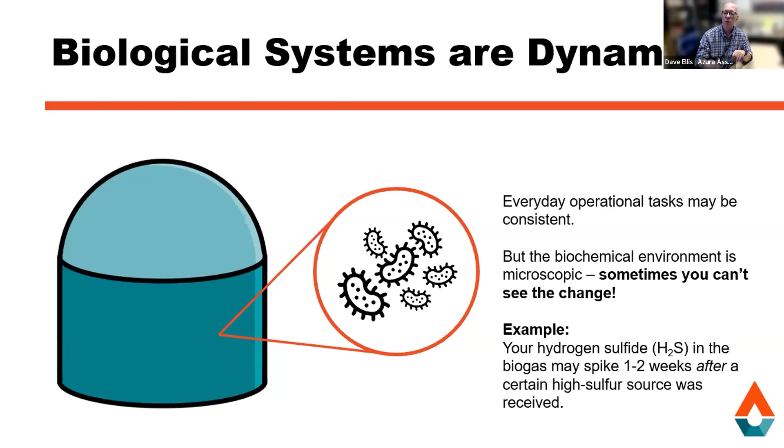Specifically, I'm talking about hydrogen sulfide, or H2S. That's a gas, a component of most biogas streams. It's extremely hazardous and can certainly kill a person in small amounts over a short time period, so it is one of the hazards. Luckily, the biogas is supposed to stay in the tank, or in the pipes, the engine, the upgrader—it's not supposed to be out where someone can encounter it.

The H2S comes from reactions that break down the proteins, or even some of the different process additives that might be part of the feedstocks. Here are some examples of feedstocks that can increase your H2S risk: first, high protein feedstocks like spoiled meat, for instance. Proteins contain a lot of sulfur, so when that protein biodegrades, a lot of that sulfur is released, and that can give rise to hydrogen sulfide in the biogas.

So say, for example, a refrigerator breaks down at a grocery store—now you might have 3, 4, or 5 tons of spoiled meat to dispose of.

Another feedstock could be from processes that use aluminum sulfate. Aluminum sulfate is used a lot in wastewater treatment, for DAF sludge. DAF sludge is a dissolved air flotation process that collects the greasy skimmings off of the top of, say, an industrial wastewater treatment plant.

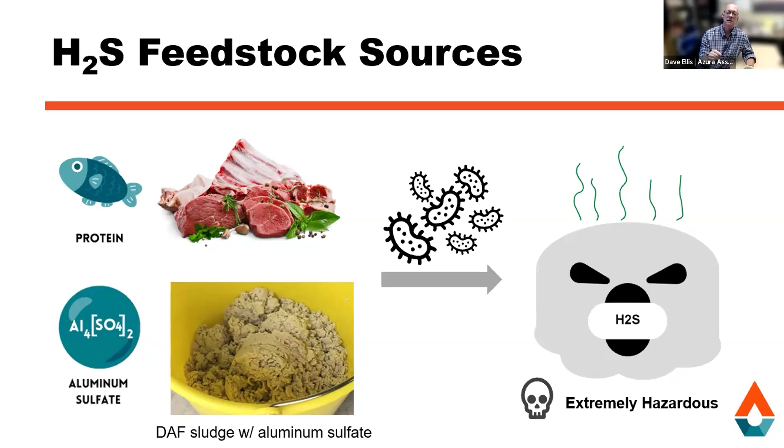Luckily, there are plenty of ways to manage hydrogen sulfide, like different iron additives that can be added to the digester, using a sulfur oxidizing bacteria in the digester itself or external to it. There are different equipment that can be used to help with that. But one key is you can strategically manage your feedstocks to minimize your hydrogen sulfide risk.

Let's see how this could work. If you've got a load of spoiled meat, a high protein feedstock, that can increase your H2S risk. If we have a different feedstock that's high in iron, like this DAF sludge produced using iron chloride in the wastewater treatment process, these two react in the digester in a way that one counteracts the hydrogen sulfide risk of the other.

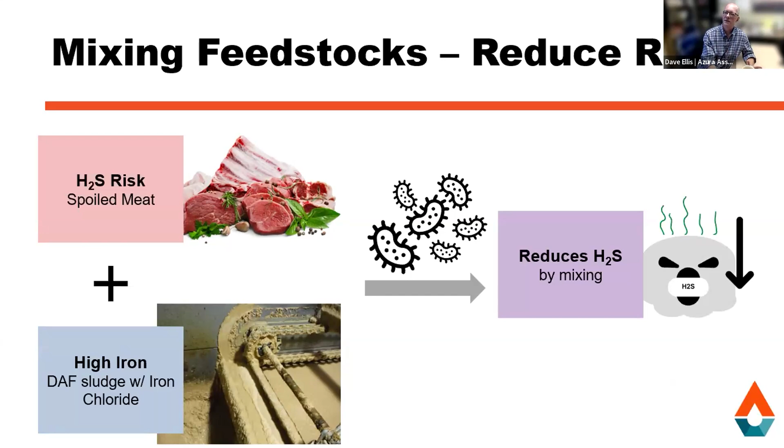Now, hold on a second though. I said something strange - both DAF sludges, just different things happening in how they are made. So the sludges can be risky or a useful tool, depending on how it was made.

Let's see here. The photograph on the left-hand side is a DAF sludge from a very large dairy milk facility in Mexico I was at last summer - they use aluminum sulfate in their wastewater treatment process. The DAF on the right-hand side, you're skimming that greasy material, scraping grease from one of the largest chicken wing manufacturing plants here in Canada. That facility uses iron chloride as part of their wastewater treatment.

So this is to say that it's important to understand where your feedstock comes from and how it's made, and how that may impact your process and create some challenges.

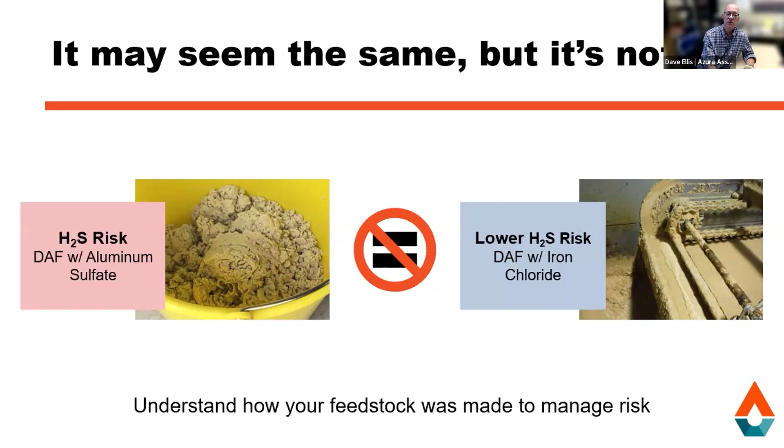Also, be aware of the safety and process risk that comes from mixing feedstocks. For example, if you have a receiving pit filled with an acidic feedstock, like fatty wastes, and the next day you receive some alkaline material, like bread waste that has some cleaning products in it, these chemicals can react in the feed tank itself and cause foaming that overflows your receiving pit.

So this is a demonstration I did in my garage lab several years ago, mixing the different materials, letting it react for about 2 hours, and it foamed up pretty quickly.

So foam can pose a number of risks. In the feed tank, the foam is slippery, so if it's out on the ground, it is definitely a slip, trip, and fall hazard. Also here in Canada in wintertime, we can have ice issues as well, which can increase the risk of slips. It exposes operators to potentially biohazardous material - rotten meat, for instance, can contain salmonella or other bacteria. And there's definitely an opportunity for an odor risk that increases the chances of odor complaints from your neighbors, and of course, regulatory scrutiny and intervention for sure.

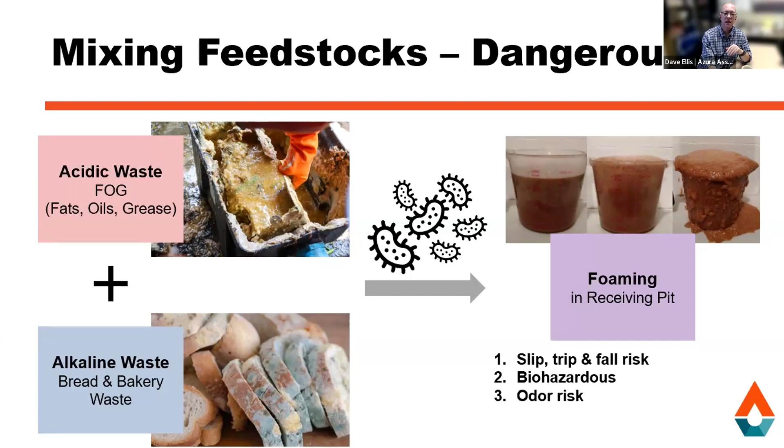So far we've mentioned a few of the process risks related to feedstock. In the time we've got today, I'm going to follow one real-life example of some of the lesser-known safety risks within each of these different process stages.

So we've mentioned different flavors of feedstock. One way to manage that is in your design of multiple feedstock receiving tanks or pits to hold the different types of material. They can be solid receiving pits, liquid receiving pits, sludge or slurry receiving tanks. This design gives operators the tools they need to manage and blend the different feed materials to get consistently great gas production.

So we can have some high solids materials, and some very high calorie fatty wastes, for instance. How the operator manages that is a day-to-day real-time process control factor that operators work with. If you have fatty materials coming in 3 days per week, being able to blend in that fat over a 7-day feeding cycle helps to stabilize your gas production.

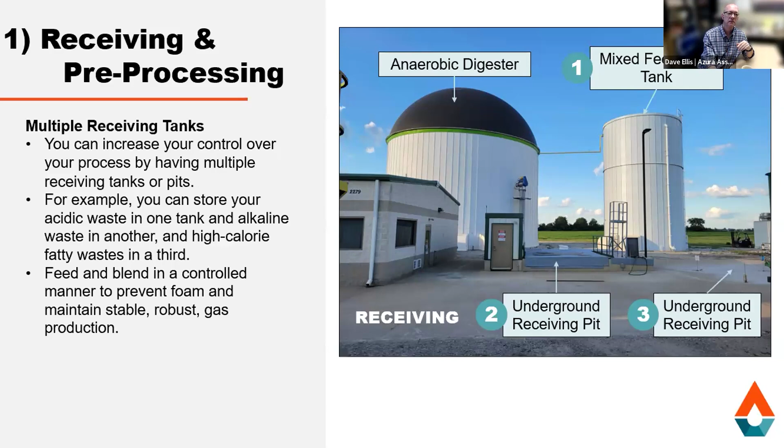Moving on, let's look at an example from the next process steps: digester operations. When foam occurs in the feed tanks, that's one issue. There's a different thing that happens if we have a biological foam or foaming in the digester itself.

Foam can fill up the tank to its high level and cause a physical overflow and an environmental release. Foam can also be hazardous because it can plug or compromise your pressure relief systems and safety systems. Flame arrestor plugging is definitely something we've seen. Even if the foam doesn't actually reach up and get into the gas train, the presence of a foam layer tends to produce a lot more aerosolized materials that can get into the gas train.

In the images here, the top right is an underground feed tank pit photograph I took a few years back. That tank had a foam event where it foamed up and ran down the side of the hill. The picture in the center bottom is a flame arrestor that's been removed from a process train, from the biogas safety train. The aluminum plates are normally new and shiny and very clean, as the one in the center shows.

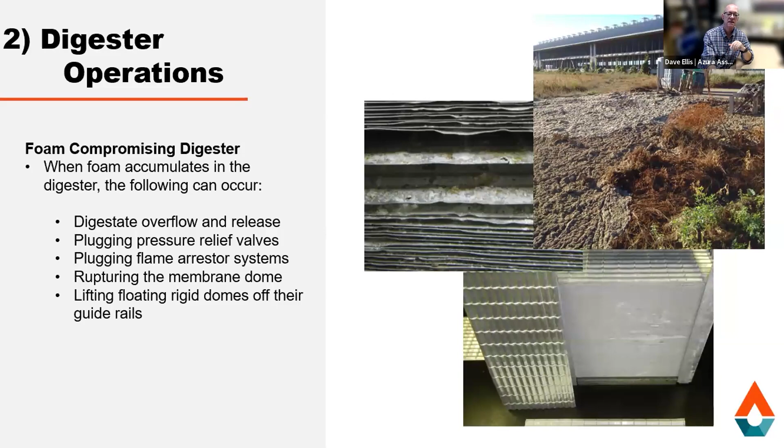Talking about biogas handling, one issue we can see is siloxanes. Siloxanes are materials present in personal care products—deodorants, soaps, shampoos, those kinds of things. When siloxanes are heated up, as in an engine taking biogas and making electricity, that can cause the formation of glass-like coatings inside the engine, on the pistons and rings, and ultimately cause a tremendous amount of damage to the engine.

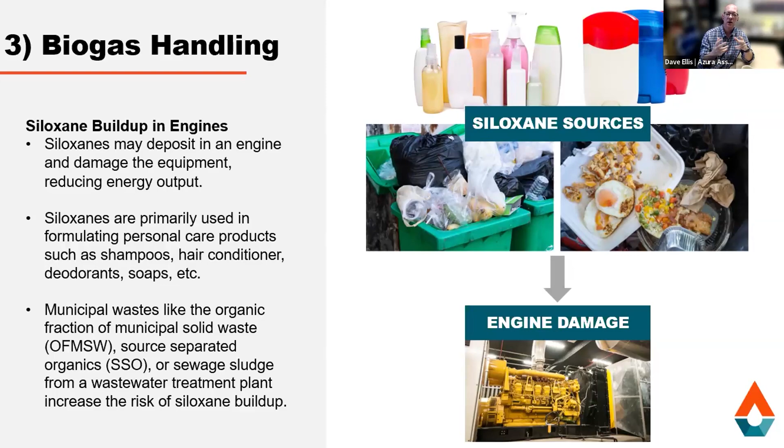Municipal waste, like the organic fraction of municipal solid waste (OFMSW), or source separated organics like curbside organics, all have the risk of siloxane presence. These are issues where knowing your feedstocks and what's in them can help you manage your system to make sure you don't run into siloxane issues.

Additionally, upgrading. A lot of folks understand that biogas is mostly methane and carbon dioxide, measured in percent levels—55% methane, 60, 70%, even 75% we've seen once or twice. But what else is in your biogas? That's typically at the parts per million level.

We know there's hydrogen sulfide from sulfur. We know proteins have a lot of nitrogen in them, which can become ammonia. We also see things like VOCs and terpenes. Now, these can be treated in some upgraders, and in others, they can actually be damaging. So understanding the trace components is important, to make sure we're able to manage those things appropriately. If they're not present, that's terrific. If they are present, it's not a showstopper—it's just something that needs to be engineered into the controls and operation of the system.

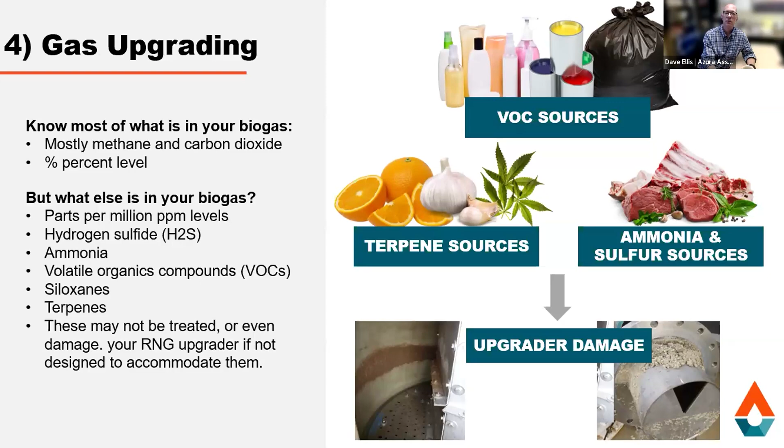Let's talk about digestate storage and trucking. In digestate holding tanks, when digestate is stored for a long time, it can accumulate small biogas bubbles in it. The H2S can accumulate under the surface, and this residual biogas can then build up, especially if there's a crusting layer forming on the storage tank.

Unfortunately and tragically, every few years on farms, someone is often very seriously injured or even killed when mixing a manure holding tank. We haven't seen this in digestate systems yet, as far as I'm aware, but certainly it's absolutely possible—we have seen digestate systems with crust on them and with potential gas buildup. This is something we haven't seen a lot of, but we know from the manure industry that it's definitely an issue and something to be mindful of.

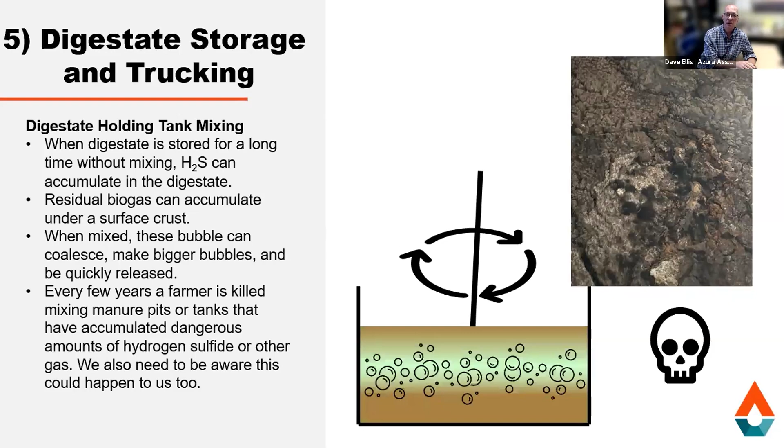So when the tank is mixed, the crust is broken up, and the small gas bubbles coalesce into large bubbles, which can come off the tank rather quickly, and in some cases actually injure or overwhelm the operator who's mixing that tank.

All right, and so the overall purpose of this is to raise sensitivity to the issues, give you a taste of what some of the possible things are to guide your thinking going forward with your projects. Of course, this is just the tip of the iceberg. We have some more material on our YouTube channel if you want to watch more about feedstocks and anaerobic digestion.

Ryan, back to you, sir. Thanks, Dave, and thanks for your presentation. Maybe one question before we move on. How can I safely test if mixing feedstocks will be a problem?

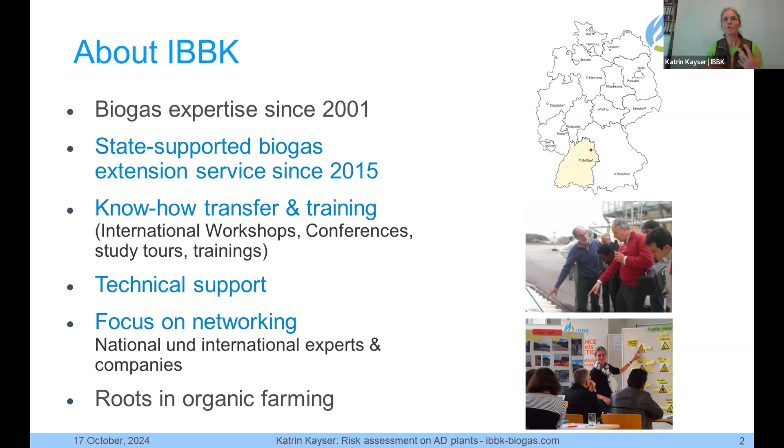The third question is, at least in Germany, fairly easy to answer. It's the owner or operator who's responsible for health and safety on the biogas plant, at least with regards to operation. So we will not further discuss this, but look more onto the first 2 questions.

So what might happen? I think everyone who's involved in biogas or anaerobic digestion has some ideas. And even if I talk to people who are not, most of them think about explosion. So when you ask them what's the hazard on a biogas plant, one of the first replies is, oh, it'll be explosion.

But we have many more hazards. It's asphyxiation or toxic gases, high voltage. We have biological hazards, as Dave has mentioned. We have also, Dave has shown a nice picture on this, hazards on the environment when there's a spilling from the tank. You can fall down, you can stumble, you have machines that start automatically, hot surfaces, you can squeeze your hands, and in the CHP room you have noise. But that's only maybe the most general things that are hazards that exist on a biogas plant.

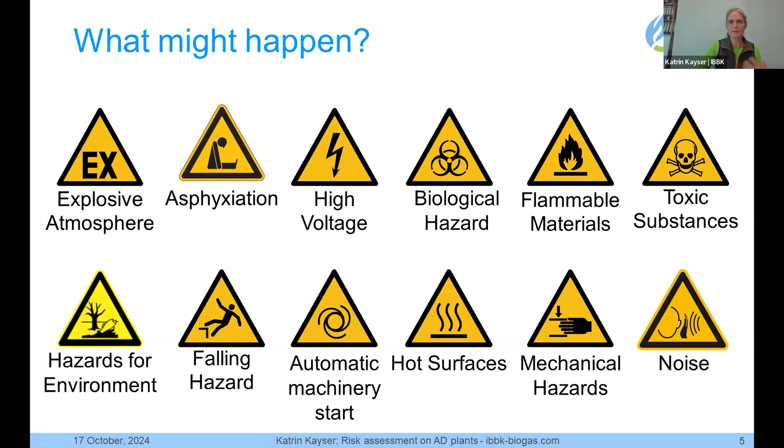And then you can ask yourself, so what can I do about this? A structural approach would be to do a risk assessment and implement safety procedures. And this has two aspects to it.

One is during the planning, design, and construction of the biogas plant. This is what the manufacturer, the planning engineer has to consider. He has to select proper components, make sound construction, and then hand over documentation that includes how to operate the different parts of the biogas plant.

But on the other hand, there is the day-to-day operation where the owner and operator has to think about safety and has to do the risk assessment for day-to-day operation.

This needs to be done to prevent hazards, or if you cannot prevent them, find ideas on how to reduce the remaining hazards as much as possible. Are there any technical measures to protect persons?

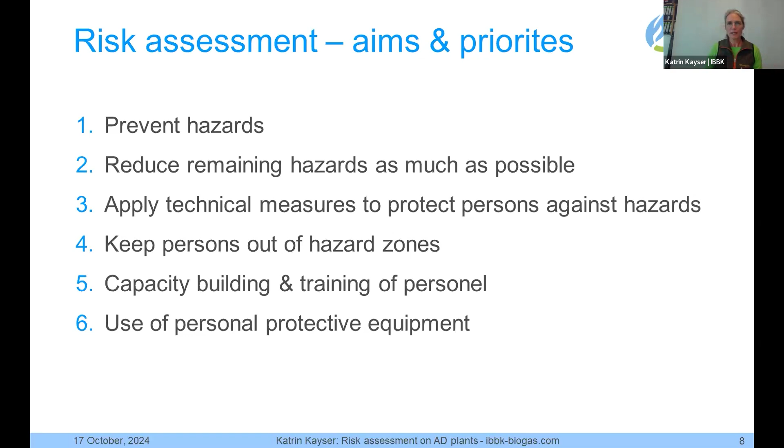So, identification of hazards. The first question: is there a hazard? I skipped the 'no' option, because on a biogas plant there usually is a hazard. When you say yes, then you need to think about appropriate safety measures and precautions and how to implement them.

And then you need to monitor and evaluate whether the measures you have chosen are suitable and effective. If they are, it's good. Then you record what you do, and this is part of the documentation that you need to have on a biogas plant. If you find, even after some time, that it's not so suitable or effective, you have to start again at the point where you found it's not working as intended.

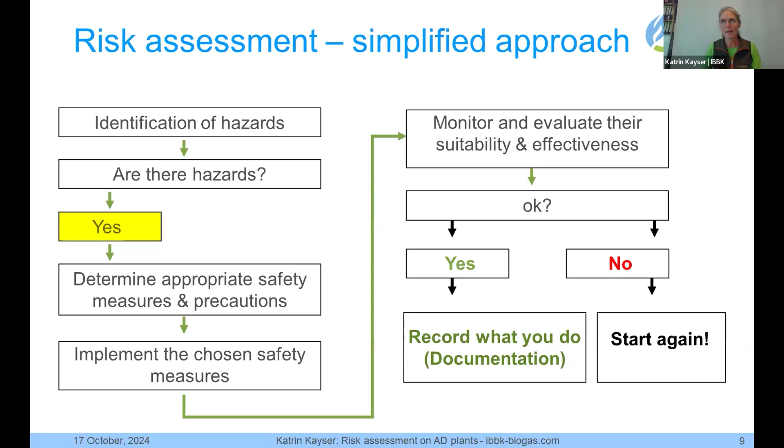When I started looking into this topic of safety on biogas plants, I found a nice paper from Nellie J. Brown, 'Conducting a Safety Walkthrough on a Farm,' from 2007, which you can actually download. I would like to share this with you because it's very hands-on, easy to understand, and good for anybody who is starting to look into this.

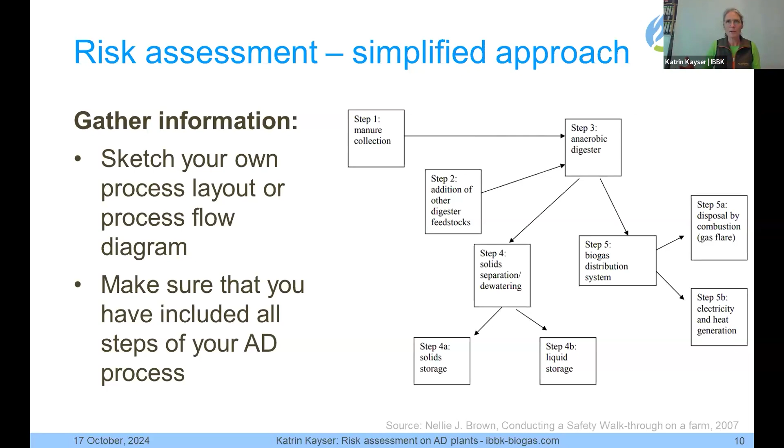Then you look at each step and think about how this task is done, and how people could get hurt, or how things could go wrong when they do this task. It's not only important to consider the operator's point of view, the day-to-day normal operation, but also to look at what changes when you do maintenance, when you have to empty a digester, or repair the engine - what changes and what needs to be done then.

Also look at the history of work-related incidents. Maybe you have also heard or seen something in the news that hasn't happened at your plant - think about this, include this. And also think about how an accident or incident in this part of your biogas plant could affect the nearby buildings or the total plant.

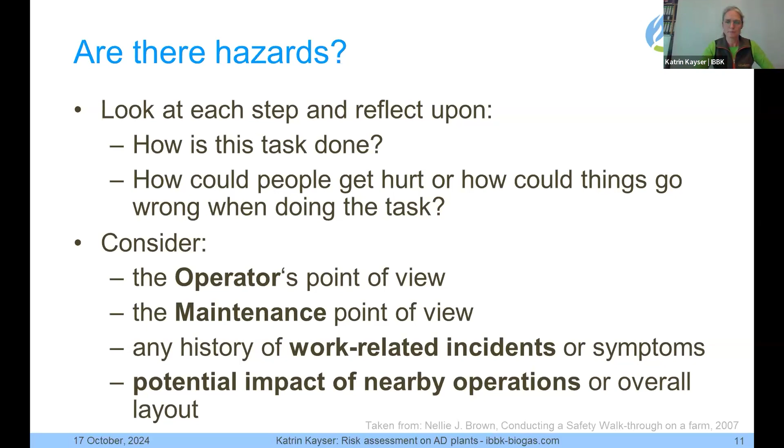I brought you a very simple example, looking just at the anaerobic digester. What an operator should do every day is go up to the view glass and check the liquid level. The view glass is usually somewhere you have to climb up to. In this case, on the photo, you see a nice staircase with handrails, so that's the safe way to get up.

But sometimes - I'm not sure about Canada, but in the German agricultural sector - you'd sometimes find a ladder to go up to the view glass, and there you have a falling hazard. That's not safe, at least not if you have to go there every day during sun, rain, storm, or freezing weather. When you look into the view glass, are you sure that it's gas tight? If you're not sure, you should use an EX-certified lamp and a gas detector, because there could be an explosion risk.

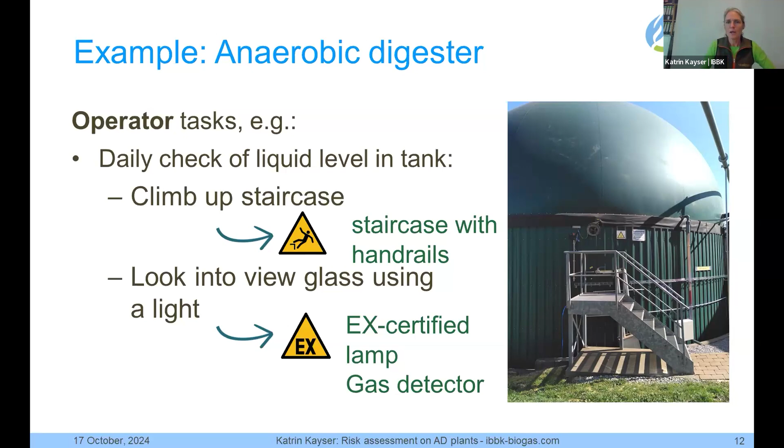And when we think about maintenance and repairs, after 8 to 10 years, maybe you need to change the double membrane gas holder roof.

What is important is that you find a company who is experienced with this and has maybe a certification. We have a strong discussion about this in Germany, because I think this year alone we had at least 3 incidents where someone fell into the digester during this work.

The operator and the company have to agree on how to do it safely. Each party brings their own risk assessment, and you cannot just say, okay, you guys are the experienced ones, you do it and done. They also have to provide a risk assessment for how they ensure their workers' health and safety on your plant.

To give you an example, one of the first steps that need to be done is to open the bolts that fix the gas holder roof to the digester brim. Also, you have to climb up. And when you open the bolts, gas will start to release, and you will have a toxic gas and also an explosive atmosphere.

So how do people work there? Do they work on a scaffolding? Is it a fixed scaffolding that goes around the tank, or is it just a movable scaffolding? Do they wear gas detectors? Do they use EX-certified tools? Do they need breathing apparatus? Those are things to consider with regards to changing the membrane gas holder roof.

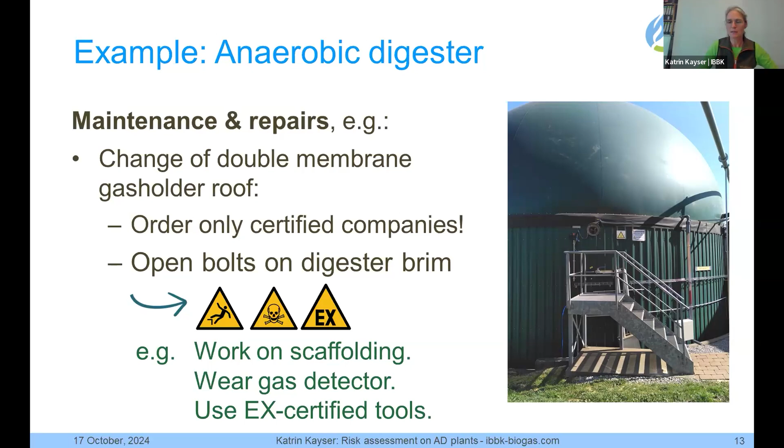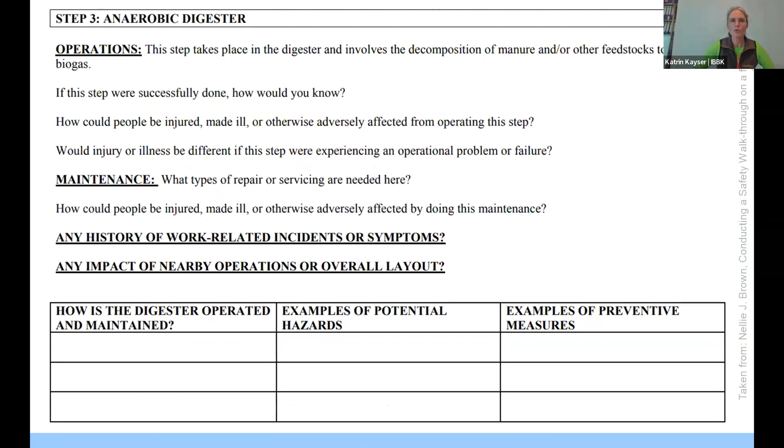That's only the first step, then there come the next steps, which also need to be considered. This publication from Nellie J. Brown does this nicely - she provides for each step some guiding questions and also some examples of preventive measures, which is really nice if you have an idea but are not sure whether you have covered all the relevant topics.

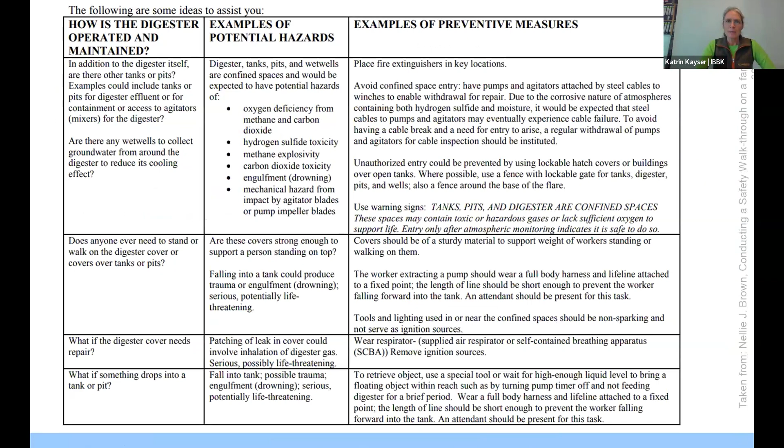With this, I hope I could give you a general overview on how to approach safety or risk assessment on a biogas plant. If you would like to know more, we have our next online training in February, so it would be nice to meet you there again. Just click on our website and check it out. And until then, stay safe. Thank you very much.

Thank you for your presentation, Katrin. Maybe one question before we move on. So you have shown some of the warning signs. From your experience, do you think that operators understand what the signs mean? And if they don't, is there like text to go with it?

That's an interesting question. When we do the safety training here in Germany, something like EX-proof, the explosion or the toxic hazard is quite well known, obviously, because that's the immediate concern. The thing about environmental hazards or maybe asphyxiation is often not so clear. But you can find all the information when you just Google warning signs biogas. You can Google this, and during our trainings we also talk about this. So there are places to learn this.

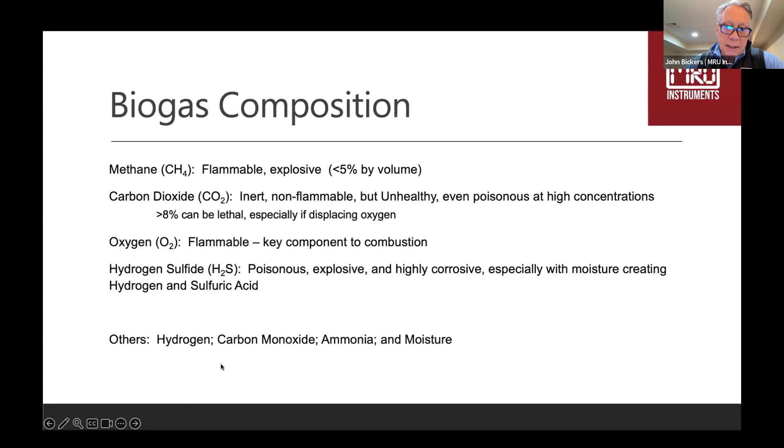The hydrogen, obviously, even more explosive than the methane. Carbon monoxide at high levels is very dangerous. Ammonia and moisture. And the moisture, of course, then makes the hydrogen sulfide very acidic and creates a lot of problems.

The good news is that generally most digesters are not going to that high level, but very often you can have landfills that go much above that. The good thing about being in most of these applications is that you're in an open air environment, so it's going to dilute quickly, but still you need to be very aware of it because it is very dangerous.

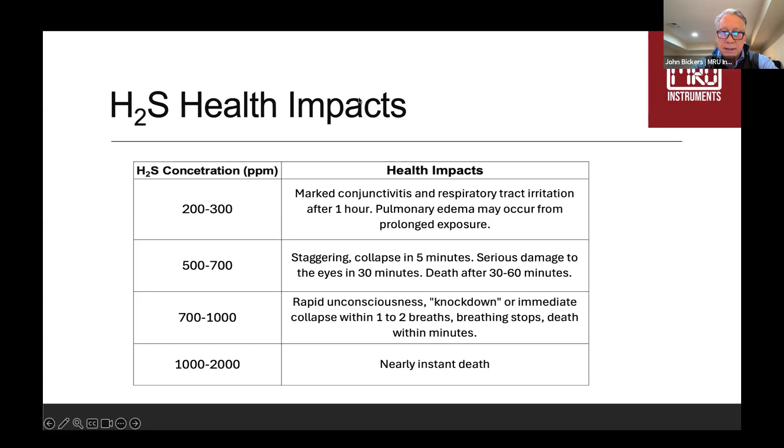So from a hardware side, these are the main devices, especially for gas analytics and looking at the gas to keep people safe. As Katrin mentioned, you really should be having your people, especially if they're outfitted with personal safety monitors. It's probably, of all the things that we're going to cover today, probably the most important, the most critical as far as keeping people safe.

As far as portable and handheld meters, these are really for process evaluation. But again, they do relate to safety in the fact that we want to make sure that these processes are within the limits of what they should be, such that we don't have too much H2S production or other things, where we're getting in front of it, and being proactive to understand that we have perhaps created a situation that's unsafe.

And so these devices really give us great troubleshooting tools, as well as evaluating the health of your process. Stationary, this allows us to have 24/7 monitoring, control, and reporting, so that we can have the systems working properly and optimized for biogas production.

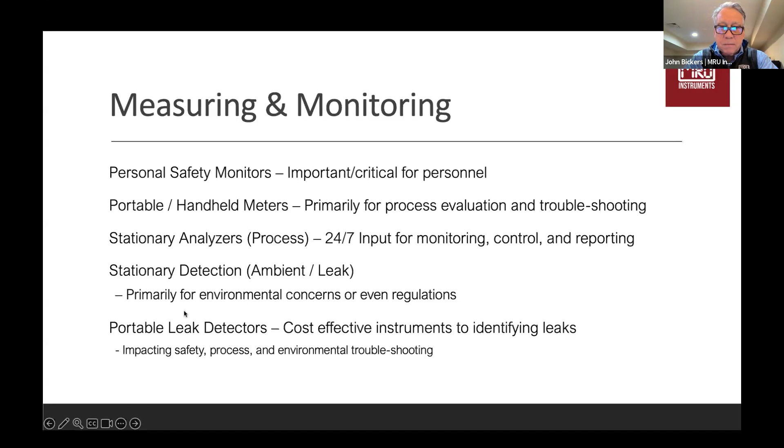When it comes to personal safety monitors, you'll generally find that there's single gas, which are dedicated to just one composition. In the situation of biogas and RNG, it'd be highly recommended that you do a 4-gas monitor, specifically of the main gases that we're interested in here. So LEL, that's going to be sort of a combination of all of those explosive gases to understand what's the potential for those igniting and causing an explosion.

Obviously, from an oxygen standpoint, we want to make sure that there's adequate oxygen so that we don't have suffocation issues and people having a lack of oxygen. And then we spoke about H2S and CO as being poisonous gases that we also want to monitor. They can be a fair cost, but again, if you consider the liability that you're subjecting yourself to, it's really a small price to pay.

The other thing I would say is that in many of these applications you've got operators working on their own, such that there's no one around to assist them should they get into danger, and these devices can help prevent them from getting into a dangerous situation.

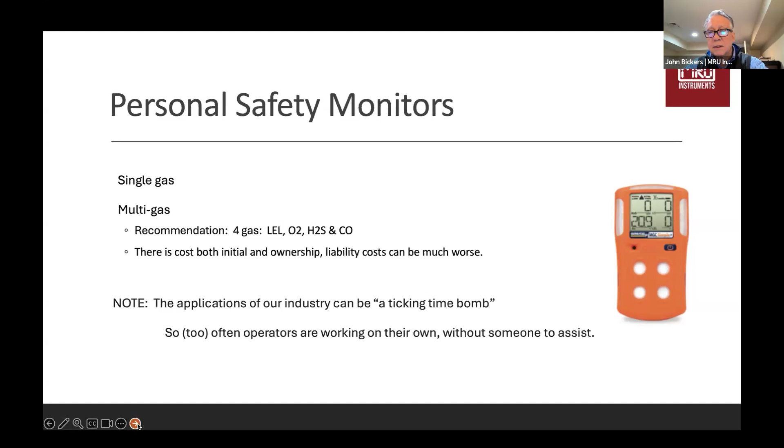So then we have the portables and handhelds. These are primarily for process, measurements made in the pipe or vessel. Generally, they measure our four main gases: methane, CO2, oxygen, and H2S. But they can also do other things, giving diagnostic information like temperature, pressure, flow, and even some may have an auxiliary device for leak detection, giving you a multifunction device. These can be used for spot checking around a digester, but they can also have software and firmware well suited to doing wellhead testing so you can optimize the biogas coming from a landfill.

One thing you should be aware of, especially with these portable and handheld meters, is there's generally a pump inside bringing the gas past the sensor so you can make the measurement. But that's generally going to vent outside right there at the instrument. So if we have high concentrations of some of these poisonous gases, your operator could be subjected to those. So make sure they're operating in a well-ventilated area, and be very concerned about confined space.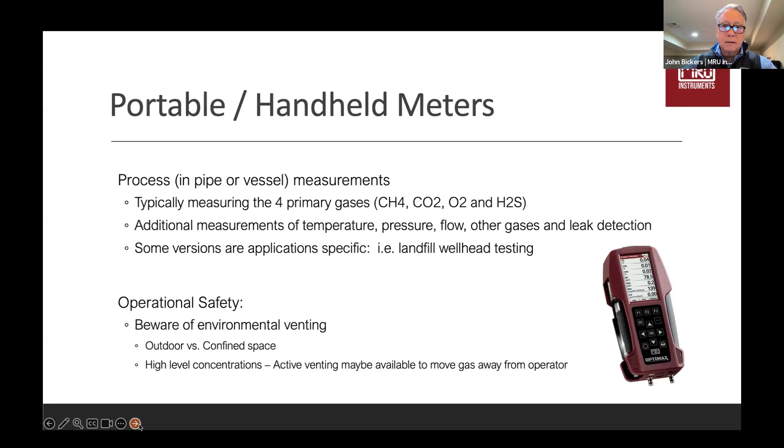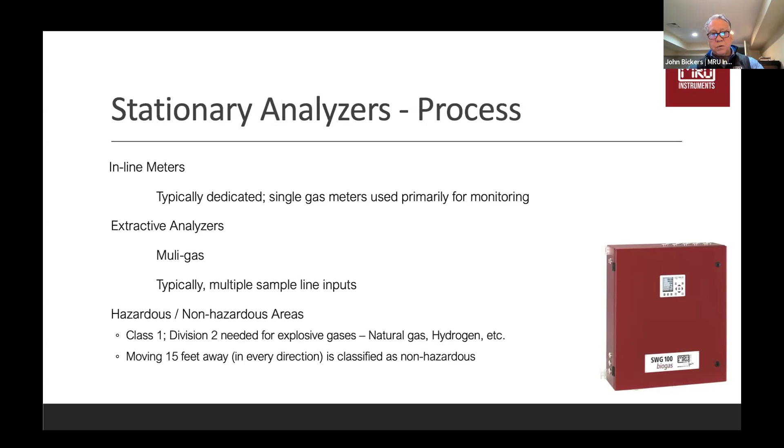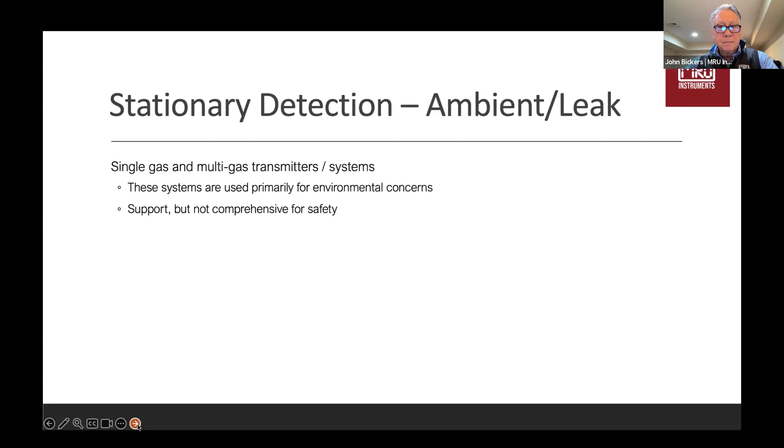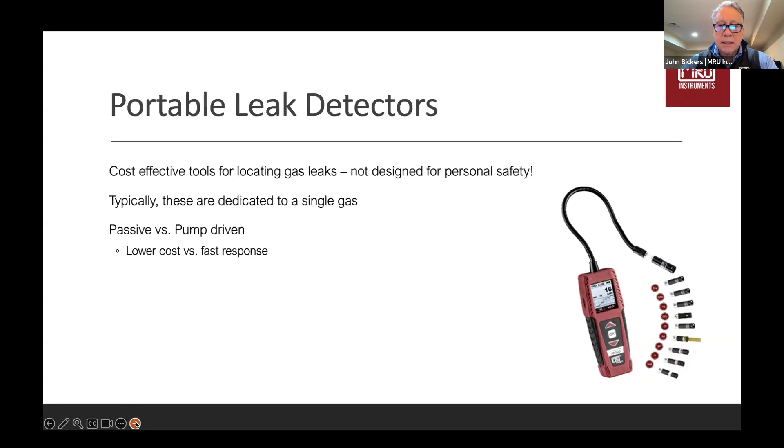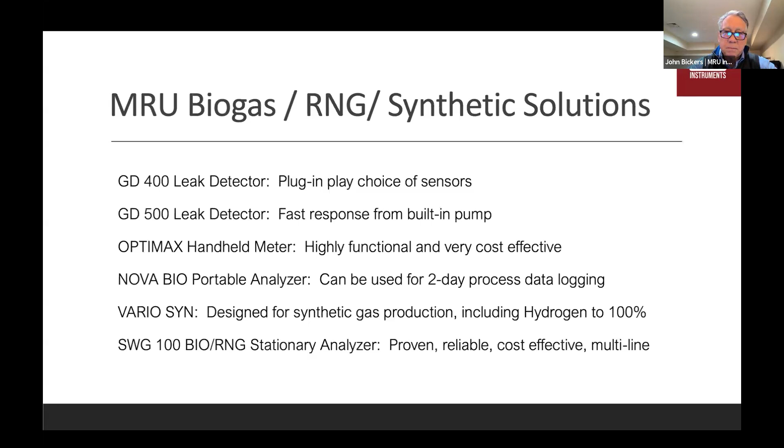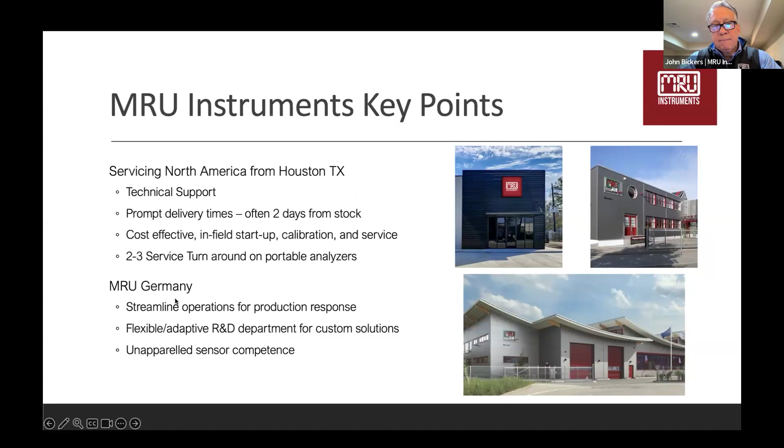Is there any correlation between safety and process biogas measurements that might be helpful for operators? I touched on this before, but yes, by understanding that the process is operating within the parameters it's designed for, that generally helps prevent a lot of safety issues. It's kind of like Dave touched on, where you can have runaway situations or things out of control — this is generally where you create your bigger safety concerns. When things are working right, the gaskets are tight, and everything's the way it should be, from an operational standpoint that generally feeds into proper safe operation.

Great, thanks. And what's the typical distance for the leak detectors? So the leak detectors need to be close by, generally within a feet to inches as far as locating those. They're kind of like a Geiger counter with a greater signal, so as you're pinpointing, you'll get a greater signal response.

Great, thank you. Maybe one for everybody. In North America and in Northern Europe there's hot and cold weather — how might these factors change when you apply it to a year-round warm climate? Dave, I'll send that over to you first.